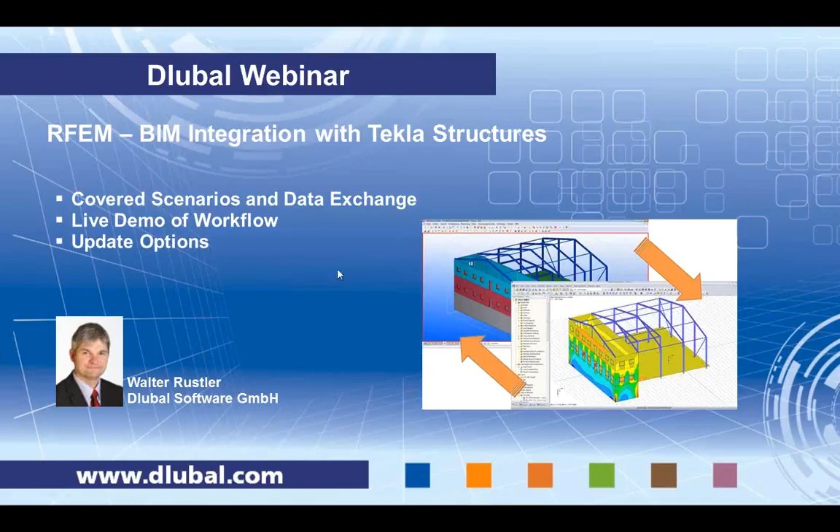It is a bidirectional interface with update options, and it works in a 32-bit and a 64-bit environment.

We can distinguish between a physical model and an analytical model, and it is important to know the difference. In general, when you work in an architectural program or a CAD application, you basically model the structure as you would build it later. When you do an analysis, you make a more simplified model that doesn't include all objects, like door frames, window frames, and other non-load carrying parts. Therefore, we have to make a difference between the physical and the analytical model.

In general, there are some problems when you work with a physical model in a structural analysis program, because, for example, a beam might be cut off at the edge of a column, and therefore there is a gap between the center line of the column and the end of the beam. So in the analytical model, we have to overcome this gap and provide a connection, basically bring together all load-carrying parts in one structural wireframe model. It's a mechanically correct model that includes maybe 1D members like columns, beams, or bracings. It may include walls, slabs, or other surfaces.

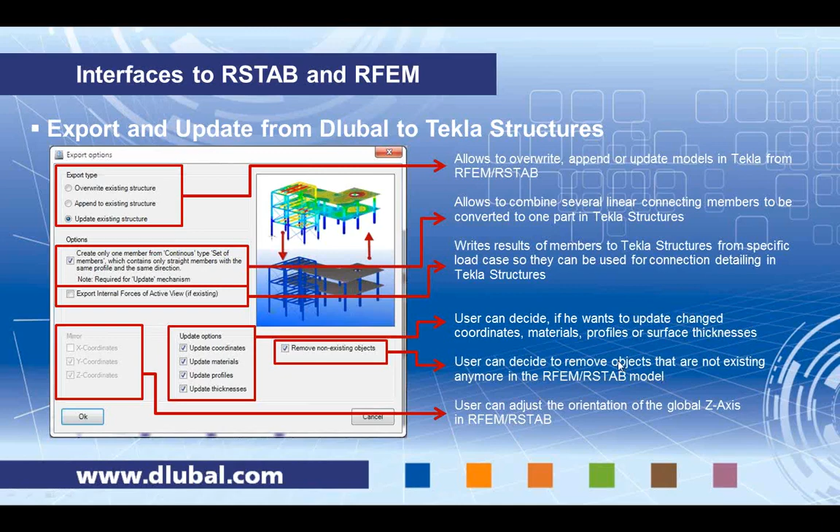Additionally, we transfer information like the node numbering of the Dlubal analytical nodes, the material, or member numbering. So you can find the parts that you see in RFEM also in Tekla Structures. By inquiring the objects, you will find, okay, member number 235 in Dlubal, this is what I have here now, and I can go to the Dlubal model and see where member number 235 is.

All those user attributes can also be displayed on a drawing, for example. So it would be a good way to use it for an overview plan that displays the numbering of the structural objects, or whatever you need it for.

Anyway, we can update the Tekla model with grid lines, with information about the used materials, and also the node numbering, and additionally comments. That means I can write, for example, this is a new beam, and then this comment will also be there as a user-defined attribute, which you can use for filtering inside Tekla and so on.

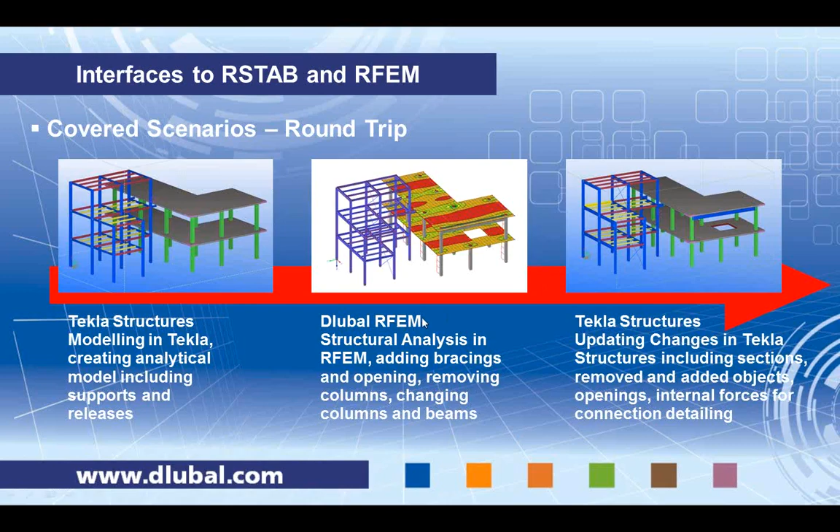Another option would be, and we will see this live in a few seconds, to start modeling inside RFEM. RFEM has great modeling capabilities as well, or you can retrieve a model from somewhere else, from other applications, and we do the structural analysis, but there is no Tekla model.

But somebody would like to have a Tekla model from what he has created inside RFEM. So we can just export it and create also a Tekla Structures model from scratch.

The advantage of this is that, for example, you are a draftsman or a detailer, and you need to know which cross-section is used for which column, for which beam. If it's a simple model you can understand and read it, but imagine there are 1,000 members and 500 different cross-sections - then it's not so easy to even know which cross-section is where.

And if I have a Tekla model and I'm a Tekla detailer, I might want to work inside Tekla, not so much inside the RFEM viewer. So I can use my own well-known tool to get this information and communicate it with somebody else, or even use it for detailing and modeling.

All in all, it is all about saving time, increasing quality and productivity, and this at the same time means avoiding errors. I think you have very well matching tools here with RFEM and Tekla Structures.

The next will be the live demonstration. We will do this 3D building here and import it from Tekla Structures. But before we do this major structure, I'd like to explain a little bit the options you have inside Tekla.

I would like to point out that I'm not a Tekla expert, but I can show it a little bit. And if you have questions about Tekla, please also contact your Tekla vendor or your Tekla company - you can find them at tekla.com. I'm sure they can help you out in more detail.

I have Tekla open in the background, and I'm now inside Tekla Structures. Here I have a simple model which is not very spectacular, but it includes a few things I think that are important to explain the use of this interface.

So here you see the physical representation of this model, and you see there are certain beams and columns. We have here the situation that some beams are top of steel, some are maybe connected center line, above, whatever. We also have here a column that is a typical situation where there's a wide column and a narrow column.

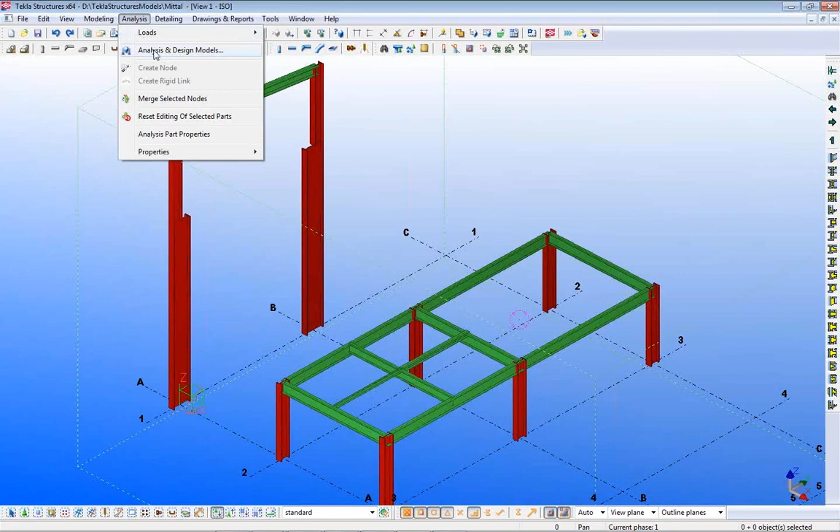And then how to model this in the structural design. The special thing about Tekla is that it has an analysis and design option here. I start this, and I have prepared already a few models, and I can show, for example, when I select this model what happens here. I get a display of the actual analytical beams.

We see here, for example, here now everything is modeled by the center lines of the columns. So the statical model is in the center line of the physical model, and because of this we have here an offset, and this offset is closed by a rigid link, which is shown there in blue. This is done automatically by Tekla, more or less.

Then we have here the beam on top of the frame, and here the analytical line is in the center line of the top flange. So it is important because you might want to have the correct column length or the maximum column length, and if I analyze it in the center of the beam here, then I would lose maybe half of the depth of the beam and so on.

And maybe if I have a wind load there, the wind load is not big enough. So how can I do this?

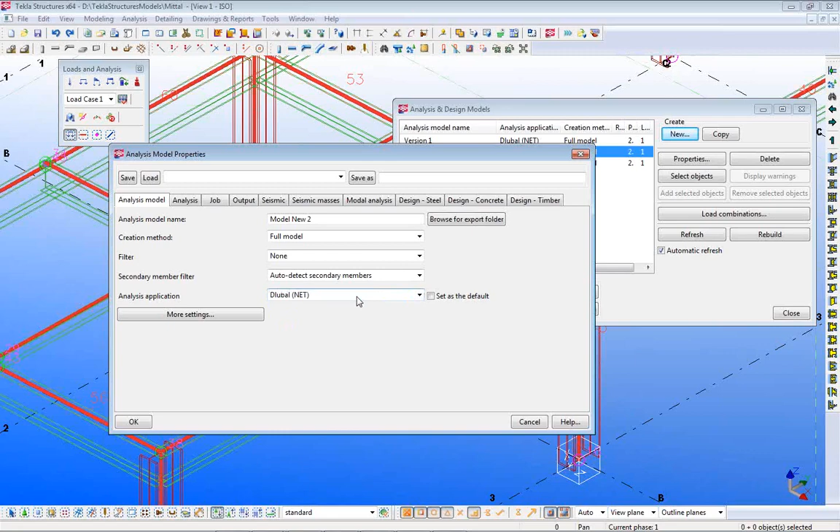We use basically what I'm showing you now. Here we have a Dlubal.net plugin, which is installed automatically when you install Dlubal after Tekla is installed. So during the installation process, Dlubal looks for Tekla Structures. If it finds it, it will automatically install this plugin, and then you can select this interface. There might be other interfaces here listed in Tekla to use.

And then we have here more settings, and in those settings we can set up the reference axis, member axis location, and this is an important thing. Now it's set up reference axis eccentricity by neutral axis. I can also use, for example, the neutral axis. If I do this and click OK, you see what happens.

All the analytical members are moved to the center of the physical member. Because we have here a different depth of the sections, we have the problem that the center lines do not meet in one point, and Tekla automatically creates here so-called rigid links.

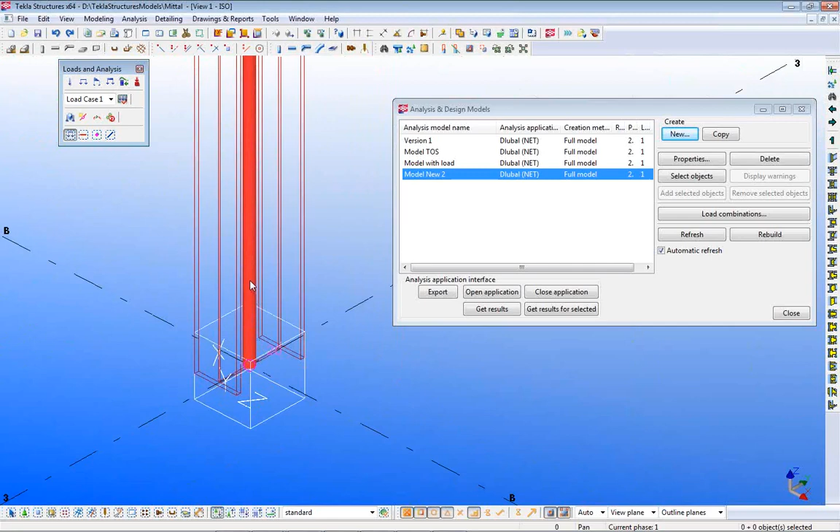Also inside Tekla we have here, for example, support conditions symbolized by a white block here. If I edit the member here, okay, let me see, to edit it, okay.

It's possible typically to... maybe I have a filter which is not, yeah, I'll show this later to you. We see here that there are numbers for beams and for nodes. We see here the supports. We see here how the physical model changes.

If I change it again, for example, to not neutral axis, but reference axis, if I do this, it is rebuilt automatically, and you see here other placement of the center lines.

Okay. Yeah, I didn't activate my mouse arrow here. So let's say I want to change something here, not globally but locally.

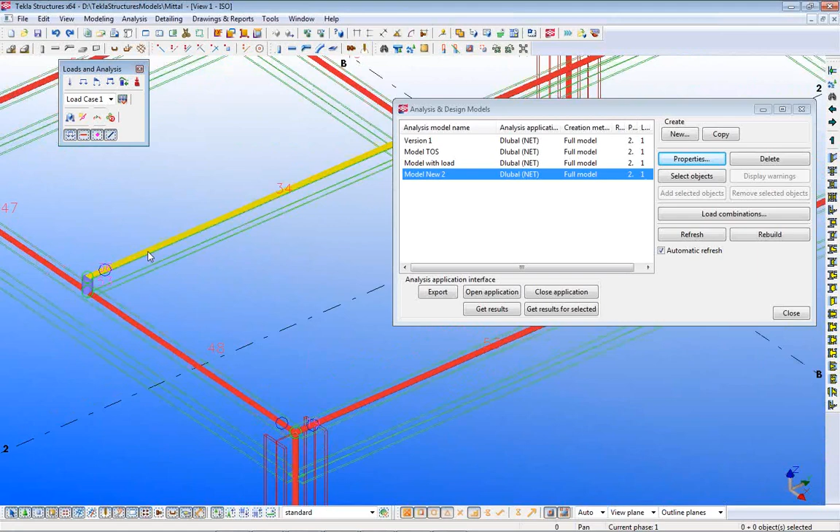For example, here I would like to say this analytical object here should not be on the reference line. I can change it, and I can say here, okay, position, not reference axis, but maybe neutral axis. And I modify it, and axis, reference axis, let's see what happens.

I had this problem also yesterday during a demo, and then it worked, but never mind.

You can do it also individually. That means you can do it globally, so all the offsets are changed, or you can do it member by member. Let's take a look at the support conditions.

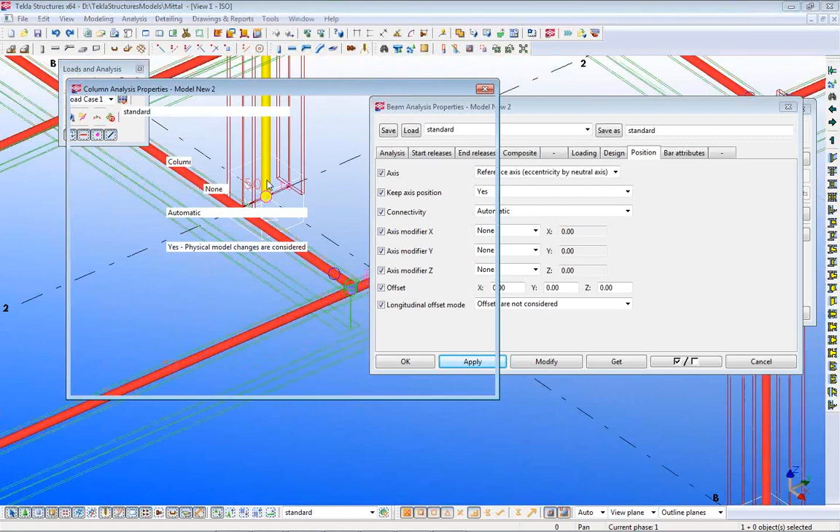If I click on the column, for example, you see here start release is a support, or it can be a pinned support, or it can be only connected, or you can have also free definitions. Then you can enter here some spring constants and so on. Or the end release is only connected. So on the top here we have no connections. Or the same thing here for the beam.

I click on it and I say start release is connected. We see here with a release, and I see here a circle. If I do not want to have the release and say I want to have it fixed, I modify it, and then it's changed.

So it is possible to individually adjust this analytical model. I open another model here.

We see, for example, there are also loads. I can display the loads basically here. You see here there's a load inside Tekla Structures where we can apply the magnitude of the load, and this is also possible to implement inside Tekla.

Maybe I try to import this model quickly into RFEM. I open RFEM here. In RFEM, I open the direct import from Tekla Structures, and I get my import option that we just saw in the slide.

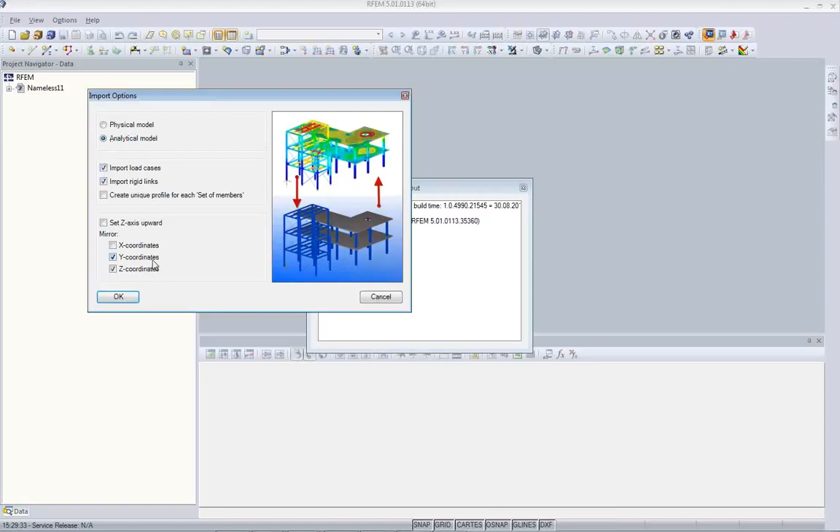I want to import the analytical model. I import load cases, the rigid links we see, click on OK, and now I have a selection of the various analytical models I have inside Tekla Structures. So the same models that I have here are given to me as a choice inside the interface.

So now I use the model with the load, which I'm just displaying here. I click OK, and there is a little bit of a protocol that goes through, and then I have here my structure inside RFEM.

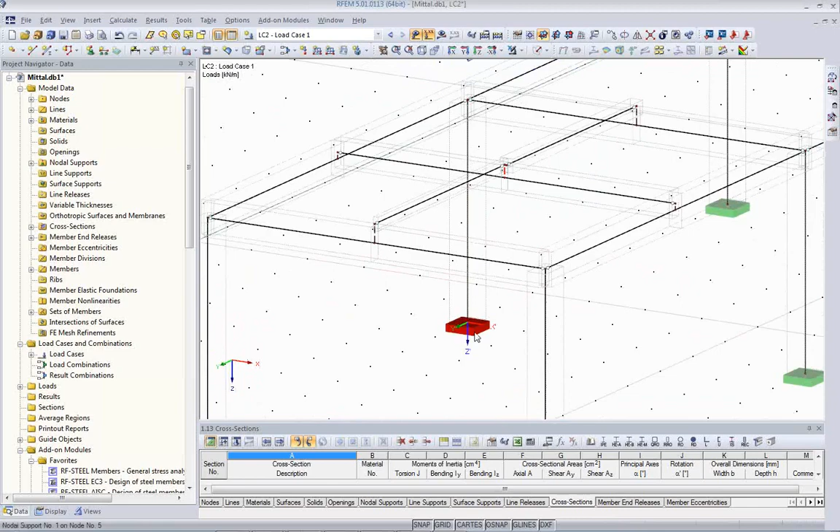We also see the load is here. And if I go to the wireframe display, we see here also we have rigid links, we have the offsets that come from the Tekla structure model. We see here also the support conditions are here that we can use and so on, and also the columns have this offset here.

So this is how you can set up your model inside Tekla Structures and change it and already prepare the structural model inside Tekla Structures.

Now I'll use the more complex model that I have prepared, and I open this inside Tekla Structures. This model includes not only beams but also slabs and walls, including openings, and I prepared several models inside already.

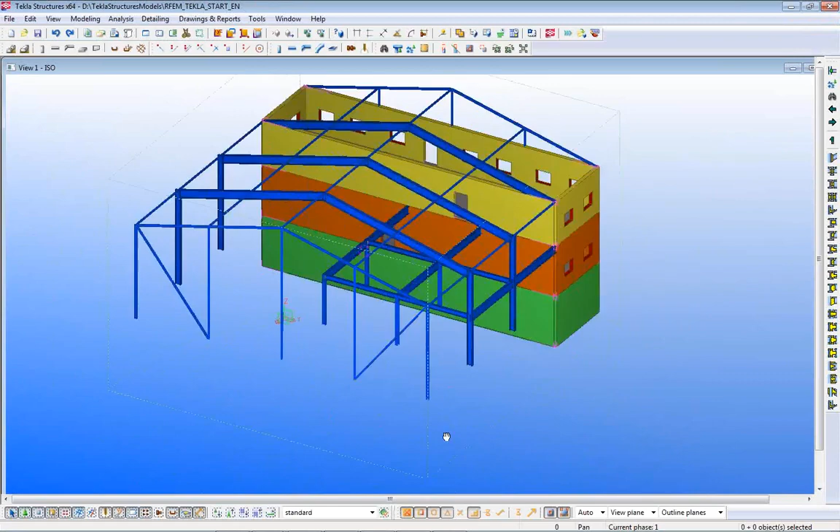You see here it's a hall including a second level here, and there is a basement including some slabs here with openings, windows, and so on. Inside this model I have prepared already the analytical design model.

Actually I've prepared several models. I have prepared, for example, the concrete part, so I only get the concrete part here. For example, I can quickly import it here. Concrete, and import here the analytical model. I don't want to load this time, and say here concrete part.

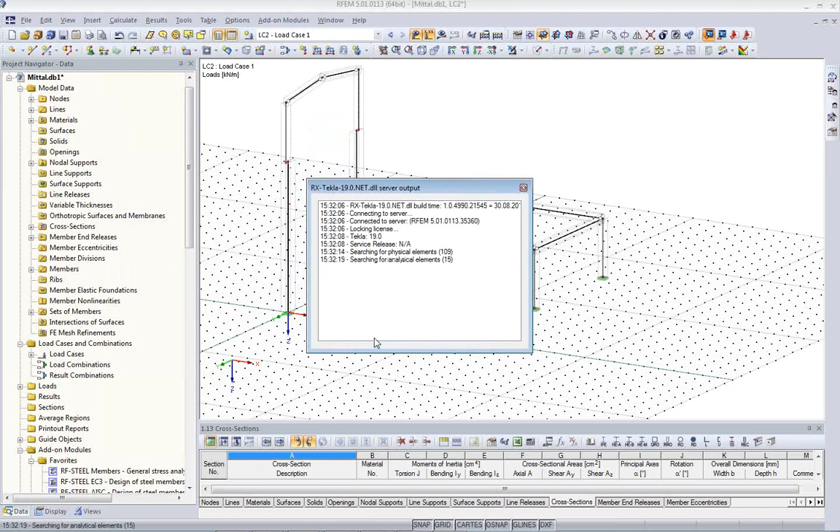So even though I have a 3D model in Tekla Structures, I can load only part of this model, and I can say, okay, now I don't want even the 3D concrete model. I want to have maybe only one floor or one slab in the first level. So I have just one slab here that I can work with, so I can do a simplified analysis.

And also the same way I can say I want to have only one end wall, and I do like a 2D analysis of this end wall here, for example. If you want to, you can import only one beam if you want to.

Please note, here's two analytical members. Inside Tekla we have one part. When I update it later, it will be staying one part inside Tekla.

Okay, but actually I want to have the entire model. Maybe I explain a little bit about the entire model that I have done in Tekla Structures.

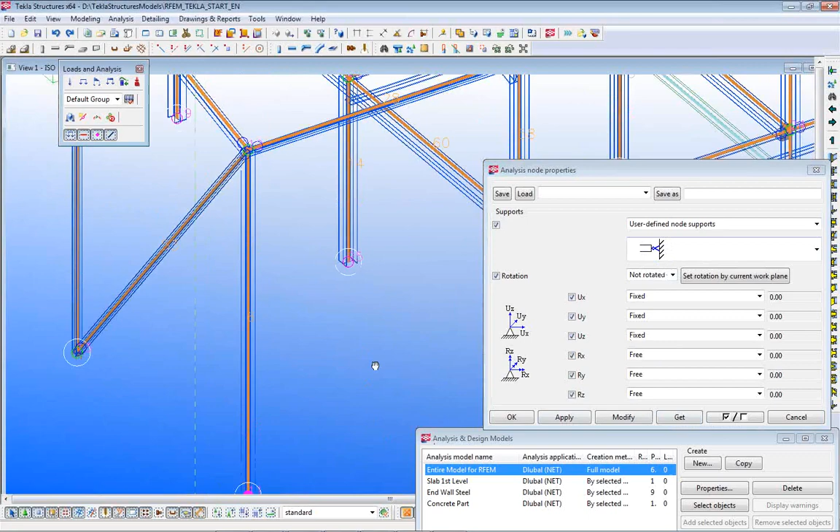Here we have support conditions, which are pin support. We have here set up releases already at the ending of some beams here.

We have openings. I've made the model in such a way, for example, that those beams here are modeled as top of steel, and this analytical model lies on top of the, in the center of the top flange.

So it's one level. And important is when we update the sections later, that those sections, even if they change in the section, they should stay top of steel.

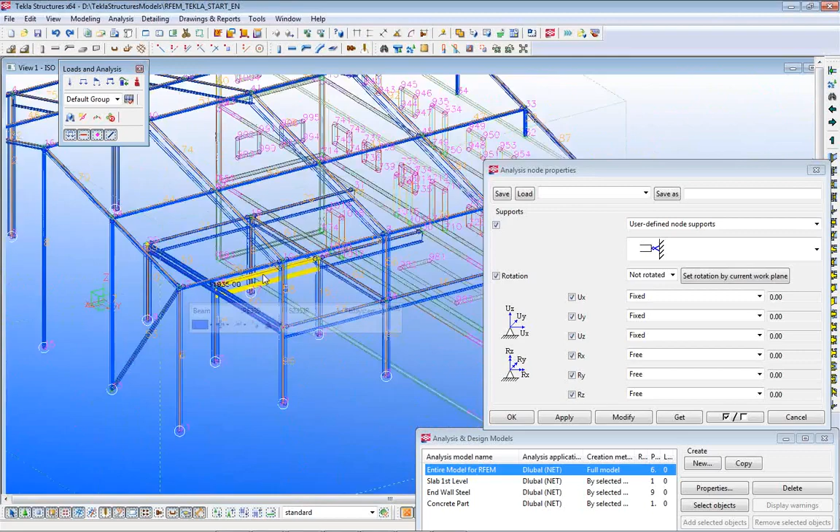Also here the walls are modeled as center lines, and the slabs as well. So I'm closing the model here and staying with the physical model view, and I start inside RFEM and import the analytical model, including rigid links, which I don't have at the moment, and I click OK.

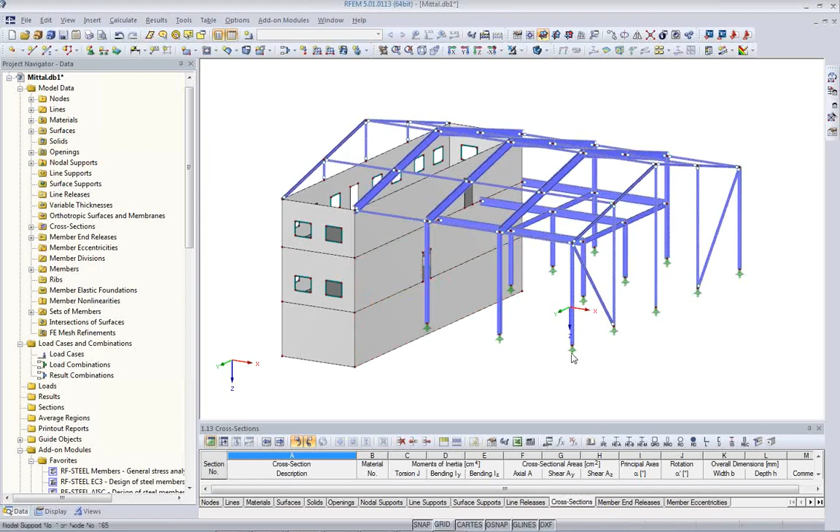We have the openings, and we see on the display that we have already cross sections imported. When I look at the table of cross sections, I see they are all converted from the Tekla designation, which is missing the blank between the IPE and 550, but Dlubal has a blank there. So we internally map all these cross sections.

Also, the materials are already set up according to Eurocode, and in Tekla the material name is much simpler. We include the code. How does this happen?

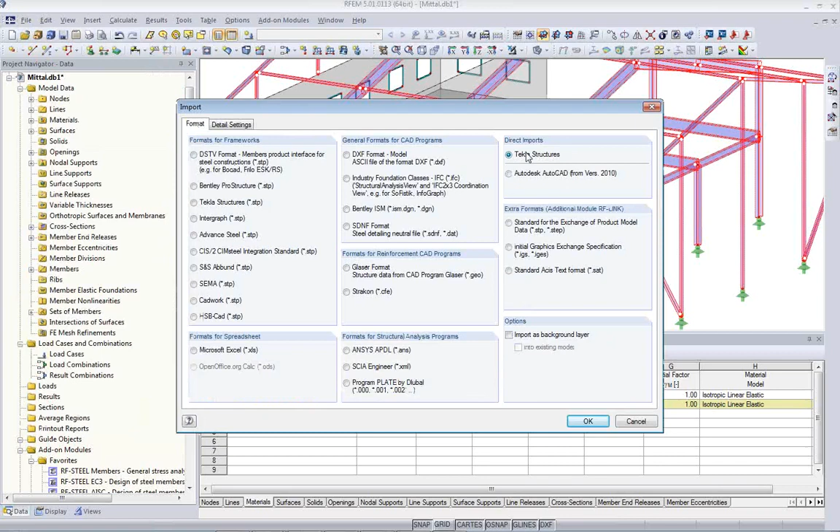When we import, we have a variety of files, of course. We use direct import from Tekla Structures, and in the detailed settings I have the option to set up a conversion file, or I can edit this conversion file. Here I set up which name of the material or cross-section should be converted to which name inside Dlubal software.

So I have the option to import or export it from Excel, and I can set it up in my company as I like it for my typical materials. Once I have adjusted it, it will be valid all the time.

The same is for example for cross sections. You can use this very well if you have non-standard sections, sections coming from different vendors. Everybody has his own designation, and for us it's basically impossible to know all the names existing in the world. So we match the Tekla name and the Dlubal name, and can now translate those cross sections automatically.

Okay, now we'll do a brief structural analysis with this model here, a 3D analysis. We'll change some cross sections, add some members, and do some concrete design. It's a totally independent model from Tekla - I can do whatever I want with it. It's not some special model that only works in conjunction with Tekla. First of all, I would like to know if it's really working, if it's really well connected and done correctly, so I do a first run and brief analysis.

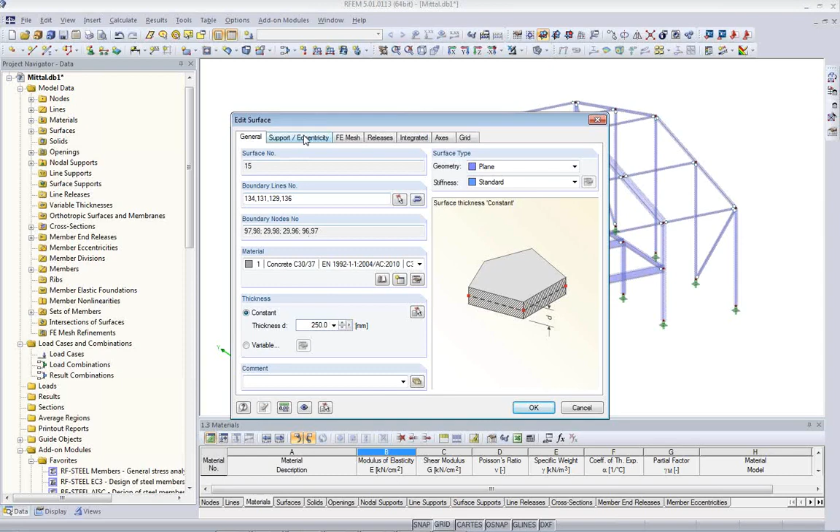First of all, I need a support on this foundation slab here, and I enter this support inside RFEM. I select a non-movable support as a first idea of this support condition, and edit the surface and add it there automatically.

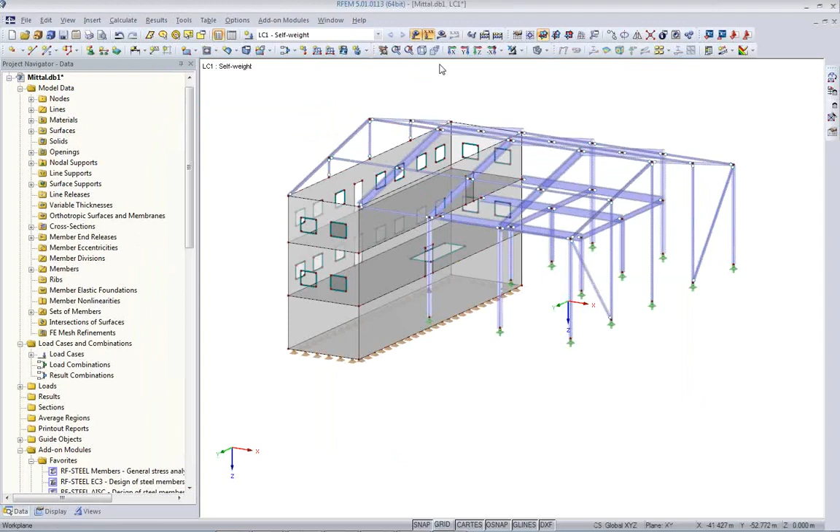Next, I need a load case to see how the deformations are, or if it calculates and if some parts are loose. So I do this simply by creating a new load case, called maybe self-weight of the structure. It will be done according to first order with a default mesh of 50 centimeters for the slabs, and we'll do an analysis. And it seems to be working.

I have here now a moment diagram which looks reasonable. I have here maybe internal forces of the slabs which look pretty okay. I can maybe show also the deflection - maybe not now for the concrete, which is rather massive, it's almost zero, but maybe I only show the steel parts.

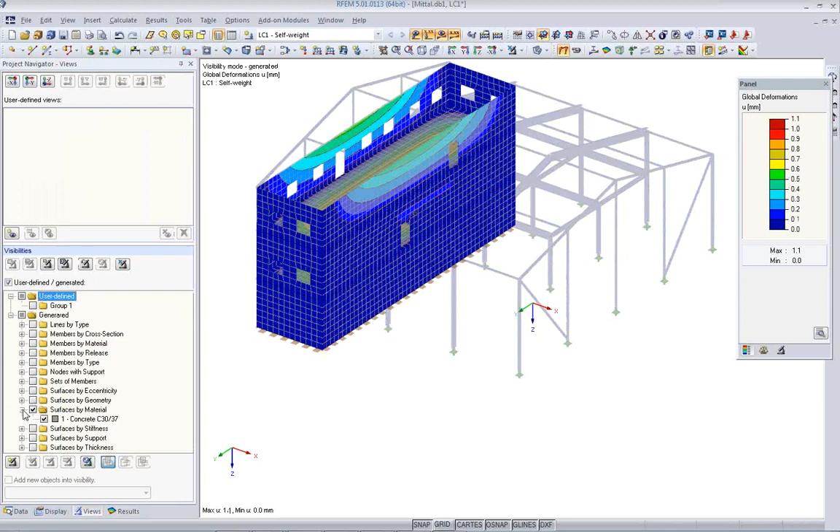Concrete surfaces by material, but members by material, so we can see here all the deformation lines of the members. I can animate them, and this way I can find if there are some loose parts usually, and it looks all good.

Also, the support condition should be more or less symmetric, which is here at the columns, at the corner columns, and there's a little bit of difference because here we have this floor structure in here, but it looks quite okay. So my model is of good quality, and I can continue doing the design process.

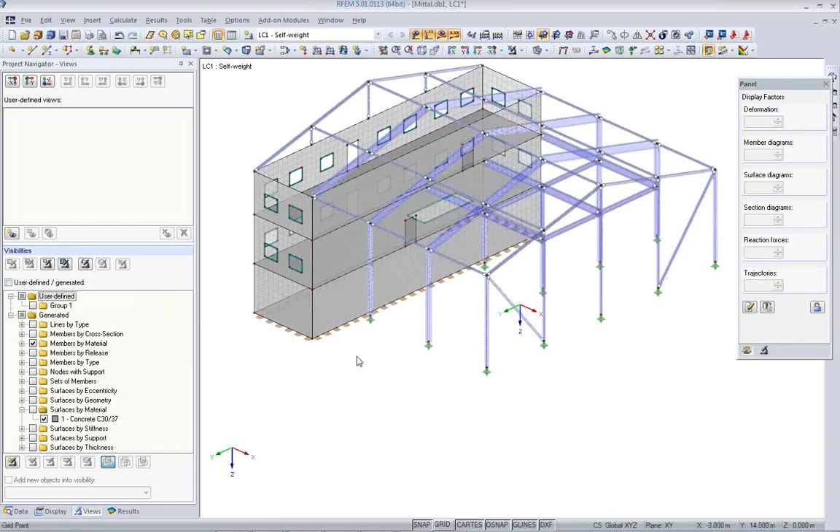First of all, I have to create - maybe I've checked another thing from the structural point of view. I need some bracings here in the roof. Typically we have some bracings here. The first level here of the grid is supported horizontally by the concrete part here, but the roof structure maybe is a little bit unstable, and I would like to have a bracing here.

Before I do this, maybe I prepare some typical views of the structure, and I select the roof, and I create a new visibility from this roof structure like this, and I say okay, this is what I'd like to save, and I create a new user-defined view. I call it roof.

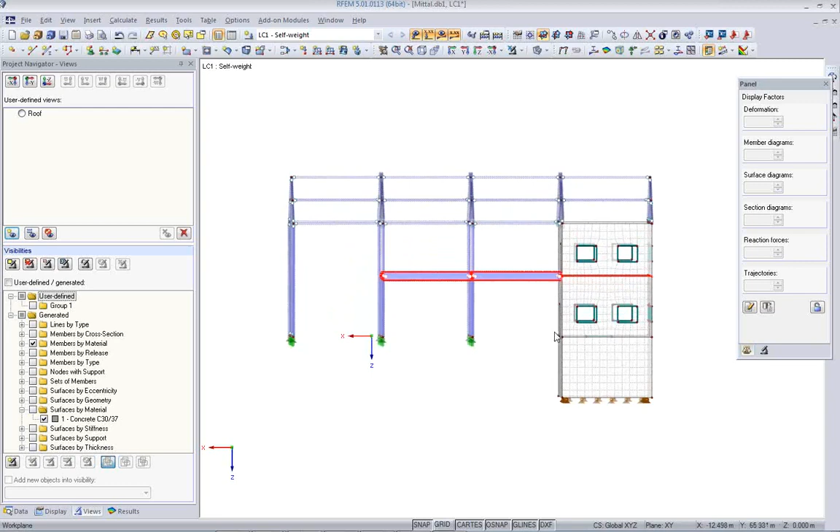Next, I like to do similar things, for example, with the floor here and the additional slab. I can select it like this and say, show me only the selected parts. This is another view I'd like to save, and I call it floors.

Additionally, when I go to the default RFEM view, it's displayed this way, but Tekla always uses this kind of view. If I go back to Tekla, this is their default view. So in order to avoid confusion, I'd like to save this view as well, and I write there Tekla. From now on, if I need a different selection of my model, I click here and I have everything I want.

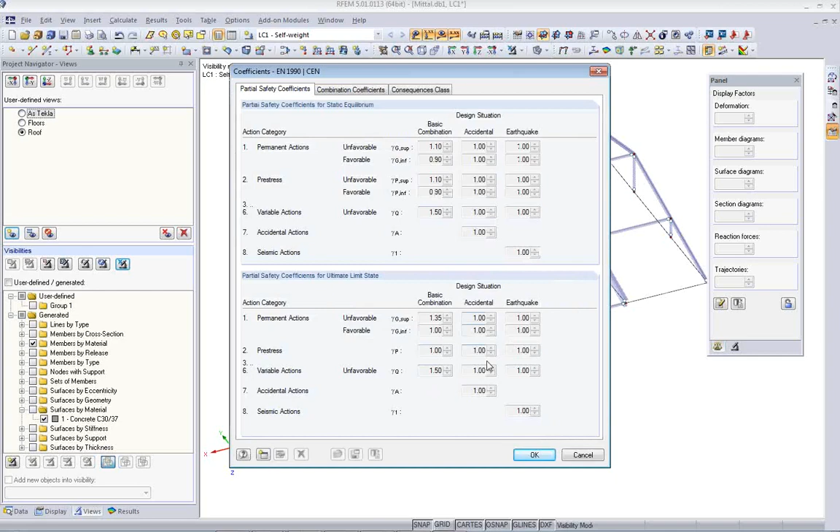Okay, let's start with the loading. When I go to the general data of the model, I can set up the load cases and combinations according to a certain code. I'll use Eurocode for this. I have here the various national annexes. Because we have an international audience today, I use the general Eurocode settings, available at the detail settings, where we have access to partial safety factors, combination factors, and consequence classes.

Once I do this, I can also create combinations automatically. We stay with a 3D model. The advantage from now on is that all the loads and load cases I enter are classified according to this code for snow, wind, and so on, and the software knows automatically which combinations to create and which combination factors to use.

I can do it most comfortably in the tables, which I can display or hide. Next to the model data, there is the load cases and combination data.

As you've seen, there is an automatic combination done, but as soon as I change the load case setting—and it doesn't regularly make sense to have combinations with just one load case—it will update or delete these combinations that had been created automatically before.

I create, next to the self-weight, a second load case called snow, and I have access to all the action categories for Eurocode. I have wind as a next load case, and another load case that's not listed, so I type it in here: live load. Then, because it could be anything written there, I have to make sure I choose the right category—this should be an imposed category B for office areas.

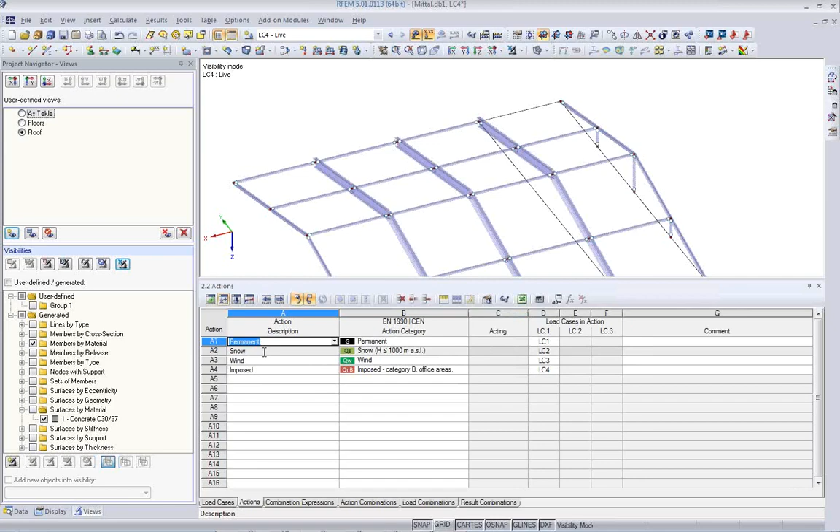Okay, I have 4 load cases, which should be enough for this demo. I have actions, which is a first summary of all the wind load cases and all the snow load cases—they are summed up in actions, and then we combine the actions. Typically we have an ultimate limit state combination and a characteristic, frequent, or quasi-permanent combination.

I want to do a preliminary design, so I'm only interested in the ultimate limit state combination. Then I do a combination based on the actions, and I do the final combinations, basically, which include the load cases and the safety factors.

So now I see load case 1 at 1.35. Most likely this will not be controlling. Or I have load case 1 at 1.35, load case 3 at 1.5—load case 3, I think, was wind. I leave it out because I already have load case 3 somewhere with 1.5 in another combination. So you don't have to calculate everything, but you have a selection here of what you really want to calculate—so you don't turn off your brain. You control the software, the software doesn't control you, and you also see exactly what the software does.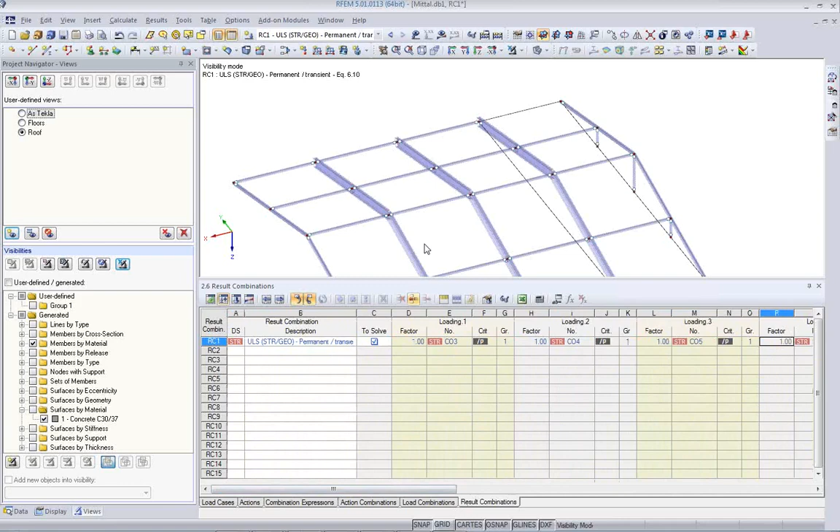Okay, then from these 13 or whatever combinations, I can create a result combination, which is the envelope of all the calculated combinations before. So I get a max-min summary of all the combinations I have to analyze. Okay, this is the combination part.

Now we talk about the actual loads. Self-weight is already here as a self-weight of the structure, but I need to add now the actual loads. So I go to the wireframe view, and I add now a roof load quickly.

It's a surface load applied to load case 1, and the magnitude in this case is 0.5 kilonewton per square meter, and it should be in the global direction but related to the true area. So I pick my boundary nodes of the surface, and I can continue doing this for multiple surfaces.

I click OK, I return to the dialog, and I can select parallel members that should not be loaded—so only the red members will now be loaded. I click OK and OK again, and I get some summary and statistics, and I see here my first area load.

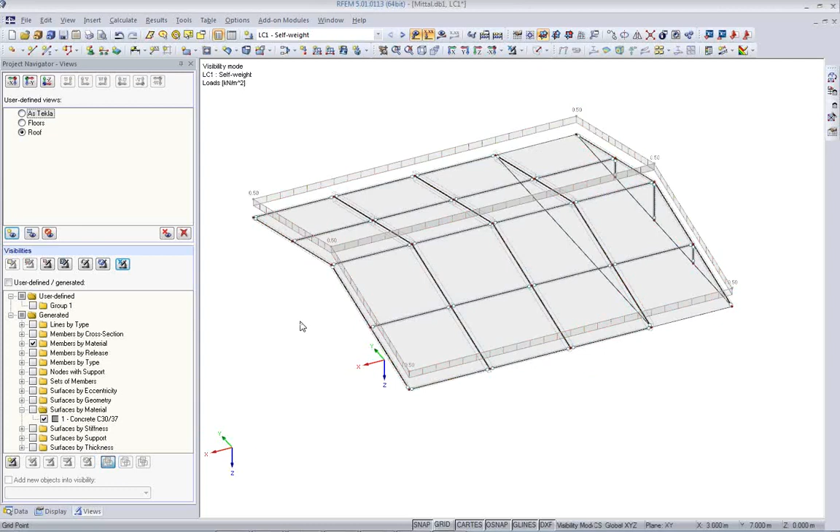The next load, our self-weight load, will also have to be on the floors. That's why I prepared this view. I create another area load, a little bit more on the grid here, and select the individual corner nodes, and decide that the distribution of the loading should be on the cross beams. Then 2 more surface loads on the slabs, 0.5 here and here.

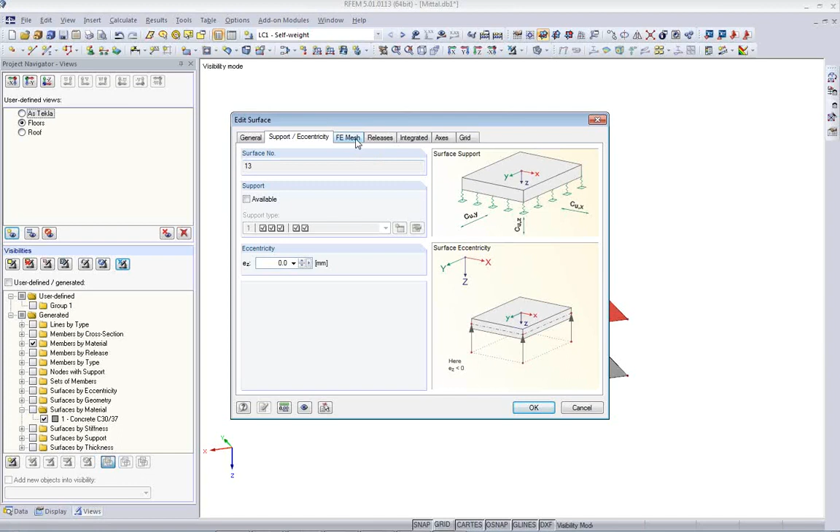While working with the slabs, I remember I forgot something. Those slabs now are rigidly joined with the walls, but I don't want this. Therefore, I double-click the surface, go to releases, and add a linear release that sets off all the spring constants for moments on all the edge lines of the surface. Then I get displayed a linear release on the edge of the surface.

I do the same thing with this second surface, create a new release of the same type, so there should be no moments at the edge in the wall. Here, because it does this automatically on the opening, I have no wall, so it doesn't make sense to have the release there. I can just select it and delete it.

Now I think I have everything regarding the model. We've looked at the self-weight load cases, and we continue with snow.

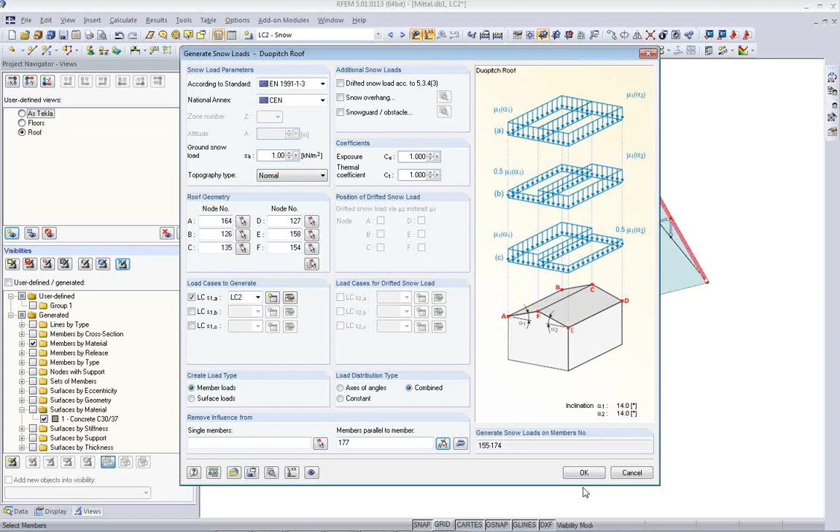Snow is something for the roof. Let me quickly get the roof here. I have a tool called snow load on duopitch roof, and I can use Eurocode here with national annexes. The ground snow load should be 1 kilonewton per square meter. I pick the boundary of this duopitch roof, 6 nodes to pick. It should go into load case 2, which is snow - it automatically filters and remembers it. I say only on the main beams I want this loading. I get a summary and my final snow load.

Next is the wind load. Wind is on the entire structure, so I go to wind here. I would like to have some wind in the -y direction, so I add a wind load as a force in global y direction, -0.5, on this surface and on this surface. On the opposite side, I have a little bit less, so I create a smaller surface load.

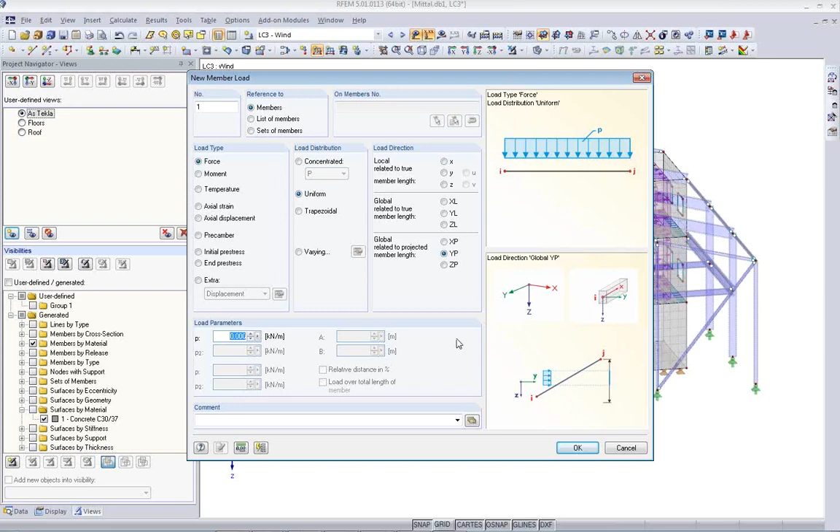I also need some loads for the columns - member loads, global y direction. It should actually, in the projection if it's not straight or vertical, be -2.4 as a member length load. On the edge, there should be a lower value, maybe only half. Then on the opposite side, again the same thing, but -1.5, a little less, for the center columns, and -0.75 for the edge columns.

Additionally, I have a wind load on the roof, and I use the generate wind load on duopitch roof function. Again according to Eurocode, I need the height of the structure, which I can grab from the structure, and I need to select the roof points.

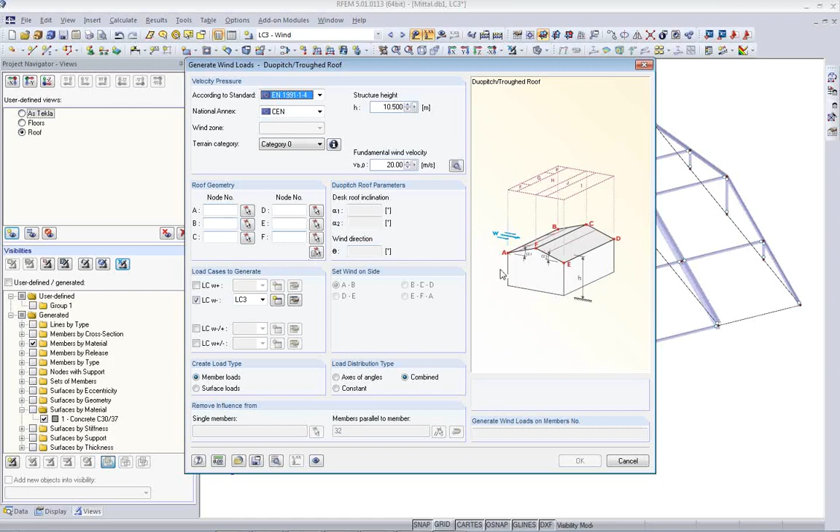I have the height, everything is fine. Now it's important to understand where the wind blows on the structure - you see here A, B, C, D - and I use this order to select my nodes as well. The wind load should be assigned to load case number 3, and I only want it on the main beams as well. You can see in the background the impact categories or areas, G, F, H, J, I, as in the code. It creates my uplifting wind load.

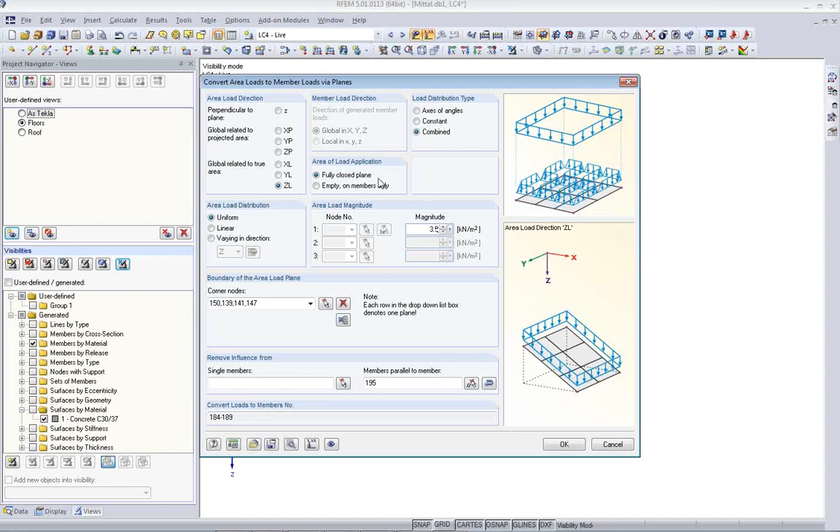Last but not least, we have a live load on the floors, which is basically simple. We can create another surface area load - it remembers the last input, so I only need to add the actual live load. It's updated here in load case 4, and the same live load, 3.5 as global, in the z direction on the slabs.

It is more or less complete now. Of course, I understand that wind loading can be much more complex - we need some load maybe working off the end walls here and so on. I think that is extra work that needs to be done.

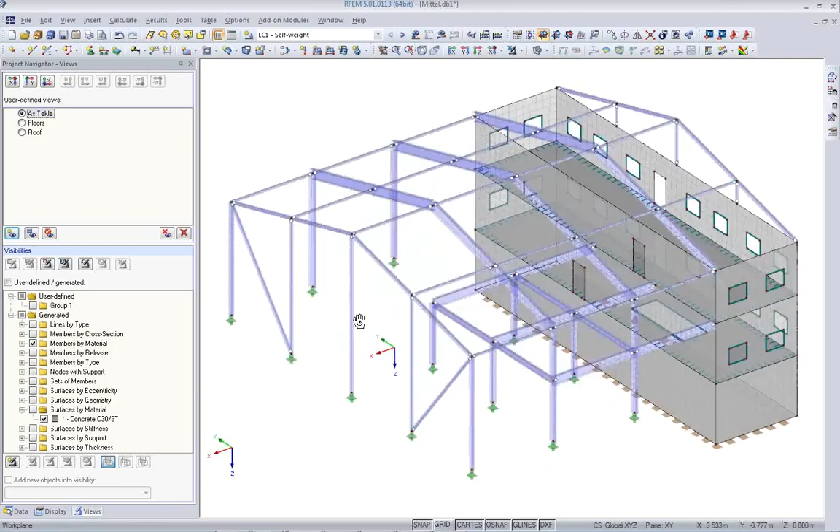We have, for typical structures, wind load generators as we've seen for the roof. But for our demonstration here, it should be enough, and we will now run the analysis of this structure.

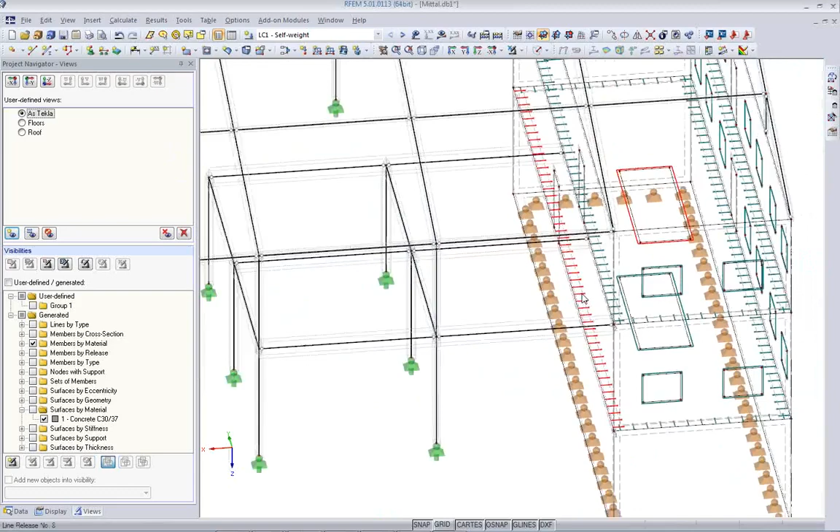Maybe before I run the analysis, I remember one more thing I'd like to do. I got a call from the architect, and he says he wants the same opening I have in the first floor also in the second floor, because otherwise there's no way to get up there. So we need to quickly copy this opening. I select the opening, move-copy it, make one copy, and copy it from here to here. Okay, so now there's an opening also on the second level.

Now we run the analysis, or we go to the design basically. Design is done by the additional module Steel EC3. I'll briefly go through this module. There are other webinars that already cover this module, as well as another seminar covering the concrete module, which I will show in a few seconds. But I will not explain all the details now, because we also want to exchange data with Tekla.

Now we go to the RF Steel EC3 module to optimize some of those sections. We have Eurocode design, we have national annexes here too, and I select a series of members I'd like to design. Here I'll use the filter tool again to select, for example, members by material, so I hide all the concrete stuff which has nothing to do with EC3.

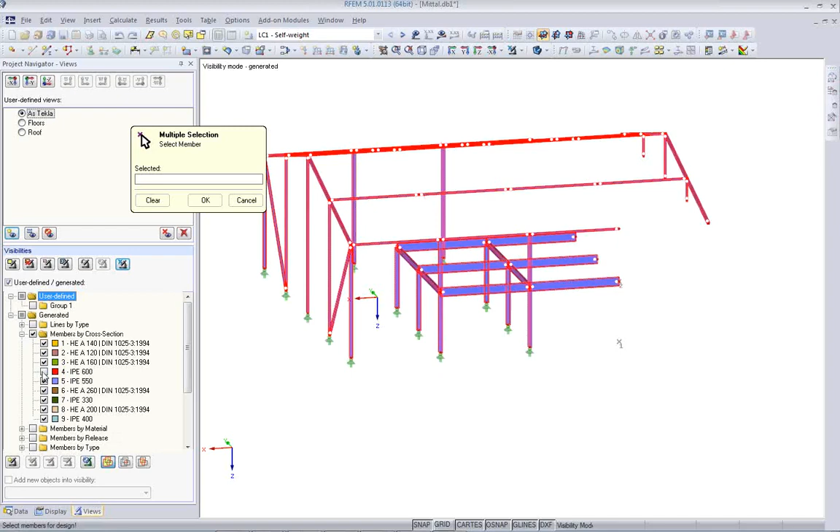Also, I can do similar things like selecting members by cross-section. And if I open this filter, I can say please do not show certain members — I don't want to see those. It has a reason: those main girders I will design in a different procedure, but the rest will be done as members, because all those members have design lengths equal to member lengths, with the exception maybe of the columns, but we'll neglect this in this case.

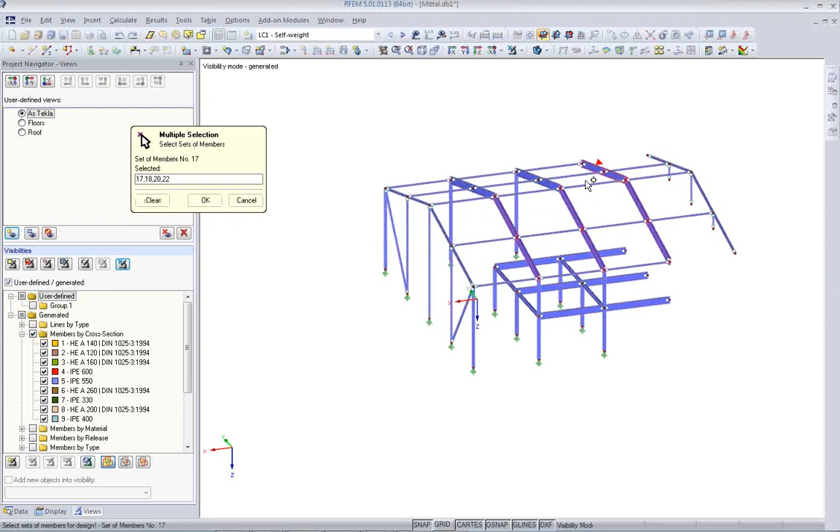I select for design the ultimate limit state combination I pointed out before, and now I'll also select the set of members. I select those main beams here, which are six main girders. The design length of these main girders is the entire length from the wall to the pitch of the roof.

It has a local support held by the frame, which I forgot to enter, supported by the bracing, which I also forgot to enter, in the center. So the buckling length in the weak direction of the cross section is smaller. I can select now in the stability design that I want to use the equivalent member method, or I can use the general method — but the equivalent member method is maybe simpler in this case, and is the more general option that's typically used, which is why I selected it here.

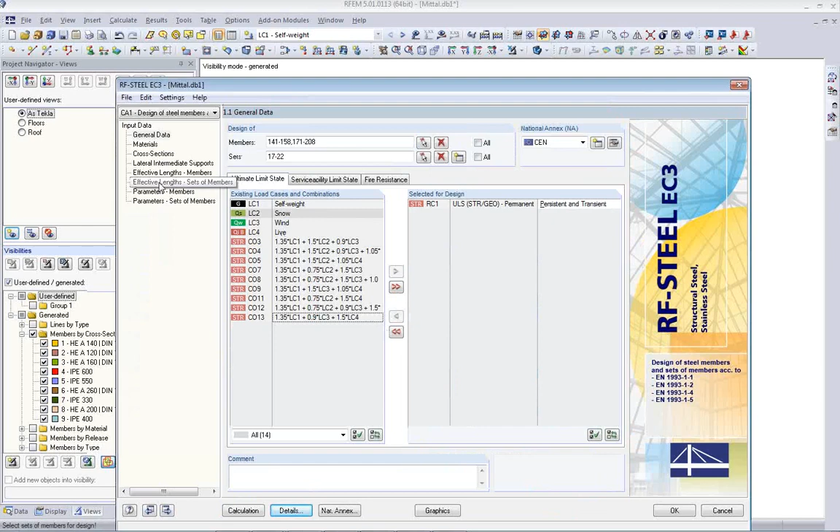We have the materials, we have the cross sections imported now from the structure. We have lateral intermediate supports for members, and effective member lengths — for sets of members too. And here I select the factor 0.5, so about the local axis z, which you can see here, the buckling length will be only half of the actual member length.

With the use of set of members, I can handle this very comfortably. Otherwise, I have the option to take into account rotational restraints from a steel deck, for example, or shear action from a steel panel, which of course increases the stability of those beams.

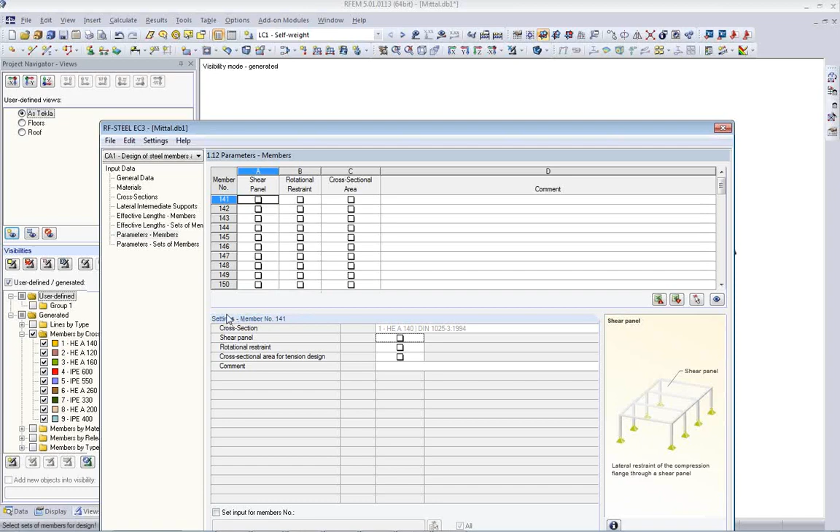Before I run the analysis, I go back and will enter the bracing, which I forgot. Let's go back to the roof. I have a tool that quickly allows me to add bracings.

Tension-only members. I create a new cross section, which I can just enter here, and select steel as the material. Now you can either go to the library to pick it, or enter it manually — if you know the name, it will automatically read it from the library. It's tension-only members, and now I can just select the bracing crosses here, which the software finds automatically as enclosed cells and gives me a symbol, and I can select those symbols. Otherwise I would have to manually enter all those beams, which is more complicated. Quickly I've created my bracing here.

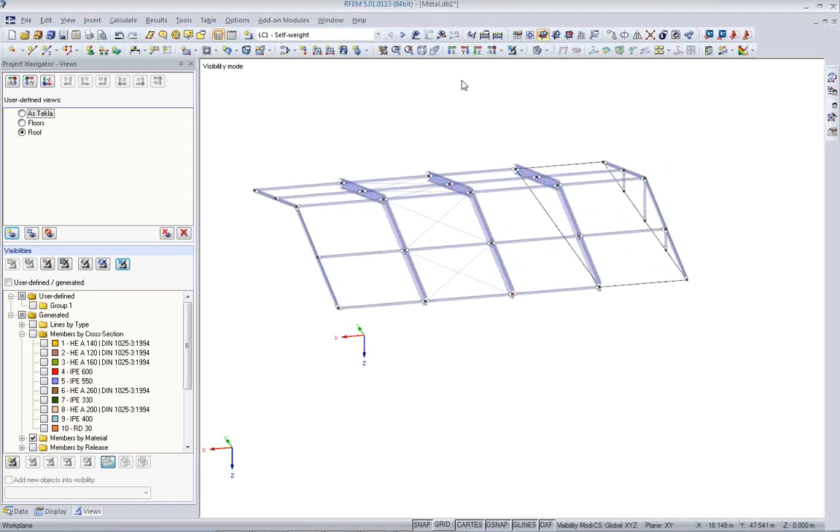Here we go, we have the entire model, and now maybe we have to talk about concrete as well. Let's design that too, right away — concrete surfaces.

We go to the surface module, and we also want to design result combination 1 according to Eurocode with the national annexes for the general settings. I have the materials as well here, the surfaces, and the reinforcement settings. I don't want to investigate all surfaces.

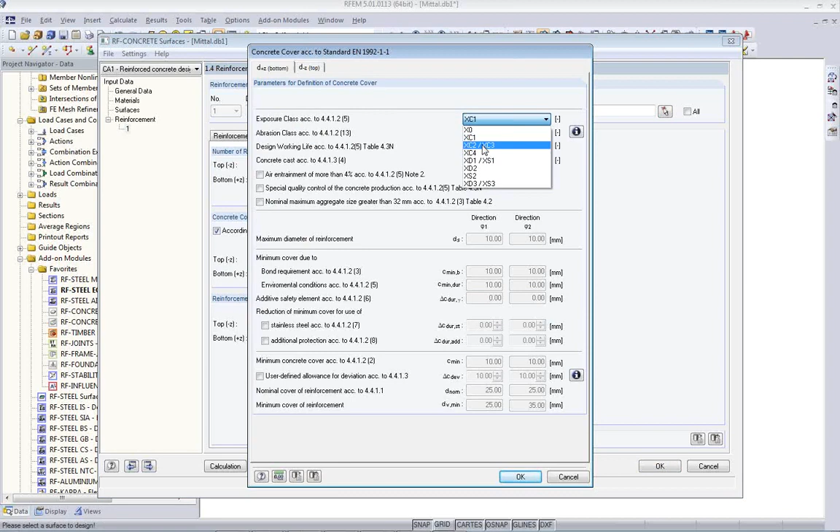I only want to have my 2 slabs. Here I need to talk about the concrete cover. I want to do it according to standard, so I just select the exposure class. Let's stay with XC1, and I get automatically the required concrete cover.

I can provide reinforcement that I decide to enter anyway, on top and bottom, to avoid cracks. There's also an option to analyze the crack width and so on, but for my preliminary design, I want to have this wire fabric here, and I like to check the minimum longitudinal reinforcement and so on.

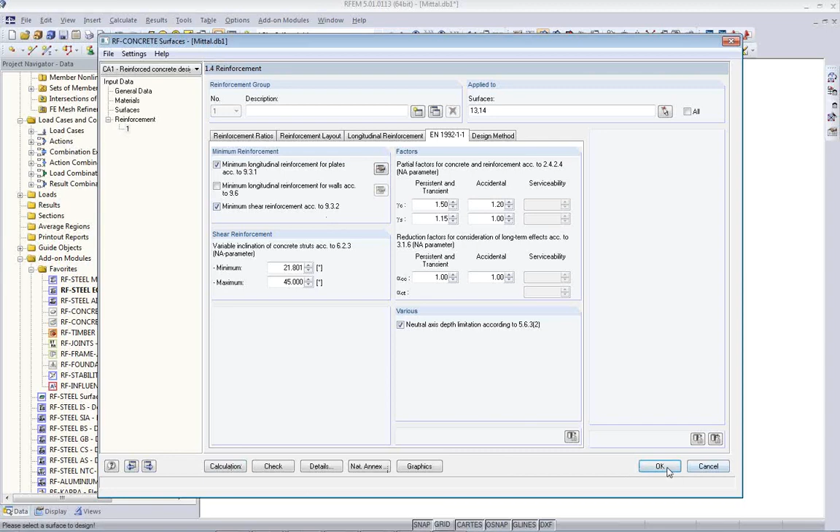So this is it for my settings, and I think now I can just calculate everything. Calculate all.

Now RFEM will calculate all the existing load cases that I have selected for calculation, and I hope everything is going well. I haven't checked it with the real loads, only with the self-weight loads, and it will take a little bit. It's a nonlinear analysis.

I can set up that combinations are done linear or nonlinear. Typically it's linear for load cases and nonlinear second order or P-delta for combinations, and we use now a nonlinear analysis, which is taking into account the additional moments from deformations. So equilibrium on deformed structure is maybe the important sentence to say here.

After a little bit we will get hopefully the results. Combination 12, and I think we have 13 all in all. So there are several iterations because we have failing members like the bracings, and also we have the second order iterations anyway.

Now we go to the concrete and the steel design, and we get finally some results. Let's take a look at the results maybe for the internal forces.

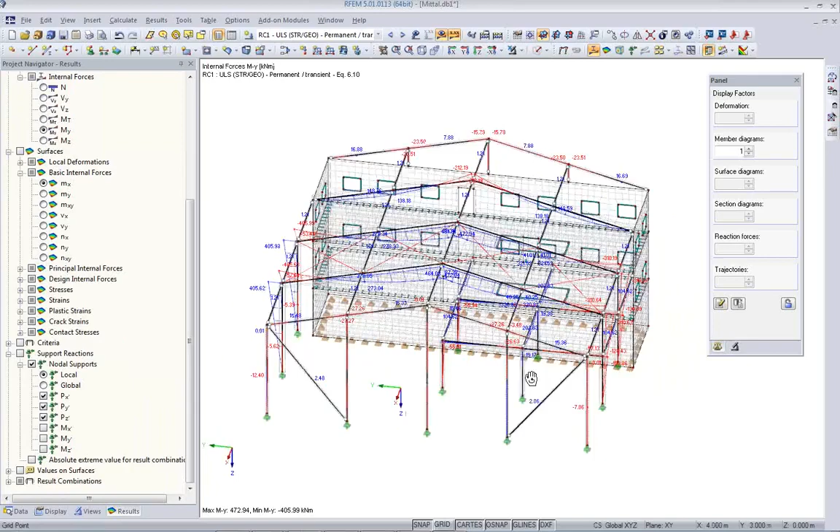Result combination 1, I go to the wire fabric display and wire display, and we see here bending moments, for example, from ultimate limit state combination. We can set up here axial forces, bending moments, strong axis, weak axis.

Looking at the weak axis bending moment, I see here, I don't like to have that. Maybe there's something wrong with my orientation. Yes, I have a frame here, it's a bending, it's a moment connection here, and it goes into the weak axis of this column, which is not good for design. So probably I have to change this. I'll remember this and do it later.

Let's see what we get on stresses. Steel EC3, ultimate limit state, design ratio is 2.55. Let's see which cross sections are a problem. I go to the cross section table and see here, okay.

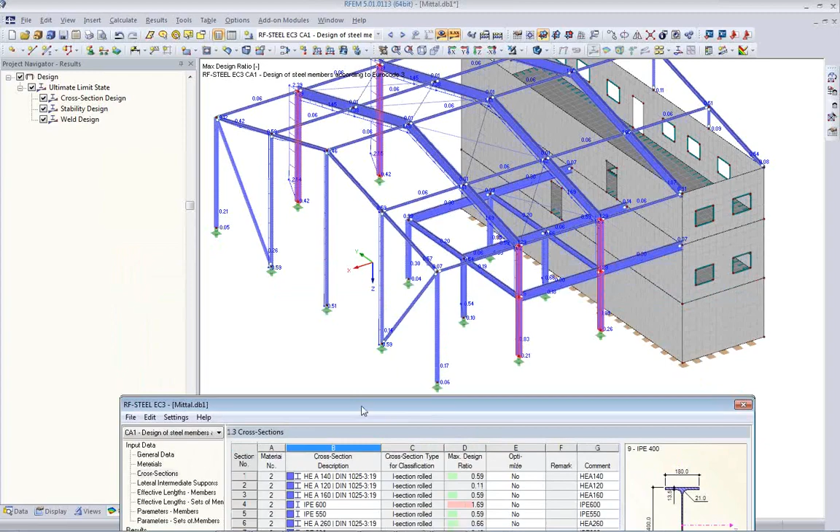There's a problem, not a problem here, not a problem here. These seem to be okay, but these main girders are a problem. Then we have the cross beams here, which are pretty okay. And I'm missing, actually, now here they are. These are the main columns here, which are not so good. We have IPE 400 here, and it's no good. So something needs to be done.

Probably it would be a good idea to have here an additional column, and also maybe to support these main girders here. Some design considerations that maybe are done while the structural engineer is doing his job.

Also, maybe I'd like to optimize those cross sections, and I optimize them from current row. This means I optimize, but I don't change the type of section. I use HEA, for example, and I stick with an IPE here. And this one I want to change anyway, so I leave it.

Those main girders maybe can be smaller, so please pick another one. Then we have here the columns, which I need to change, but anyway, I'd like to set them up for optimization. I also want to optimize those, and my main columns I want to optimize as well.

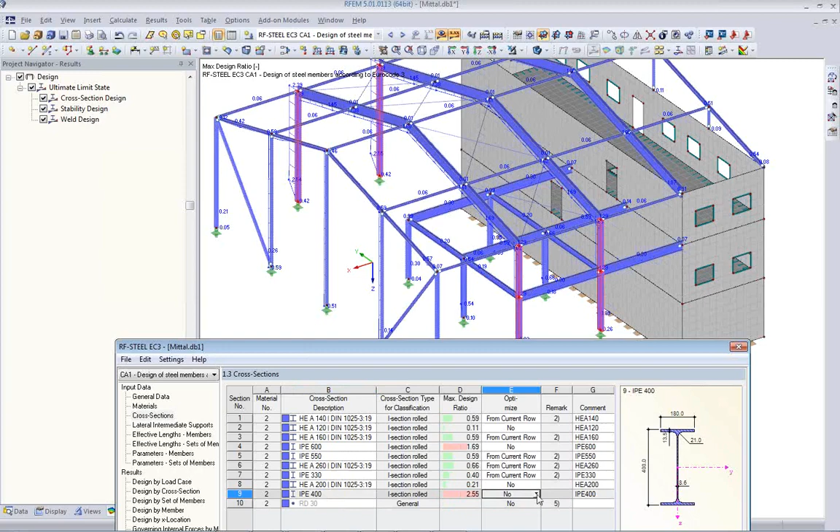I run the analysis now only in the steel check. So I rerun the analysis here, calculation, and see what I end up with for my internal forces that I have now.

So it picks an HEA 120 for the corner, 140 here, which sounds reasonable. 500 is okay, we have 240. Okay, let's stick with it. 240 instead of 330 here, and this is 600, so there's nothing to be done.

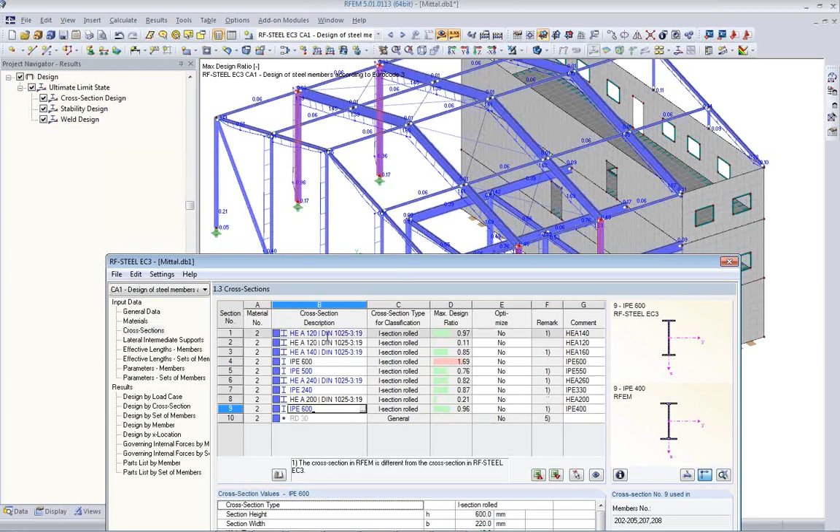But now the blue cross sections are optimized, and I can export them to RFEM to update my internal forces. I do this now because I have a better idea already from these cross sections. Okay, they are updated now from the initial design, and now I'm doing my model changes additionally.

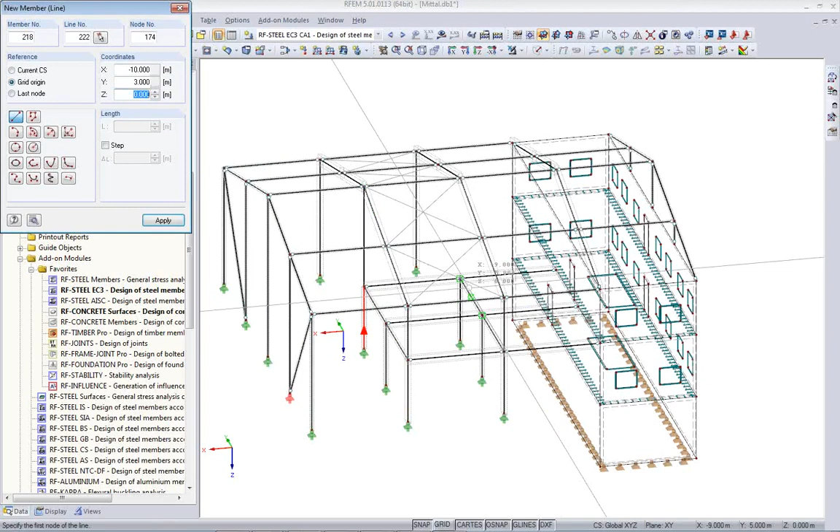That means I want to have a column here. I pick the type of column from an existing beam, so I have the orientation and the cross section correctly. Say okay, from here to here, and the same thing from here to here. Also I'd like to have this little column here at the same type. I copy it, make one copy from here to here.

Okay, so everything seems reasonable. Now here on top, I want to have an additional member release, so I have an easy connection up here. At the other end, I cannot forget to rotate my columns by 90 degrees, so they are carrying the moment in the right direction.

Voila. With this, I go back and run my analysis for Steel EC3. I just click, please show me results of Steel EC3, and RFEM will automatically update the results. This takes another few seconds, which allows me to explain something more in the Tekla model.

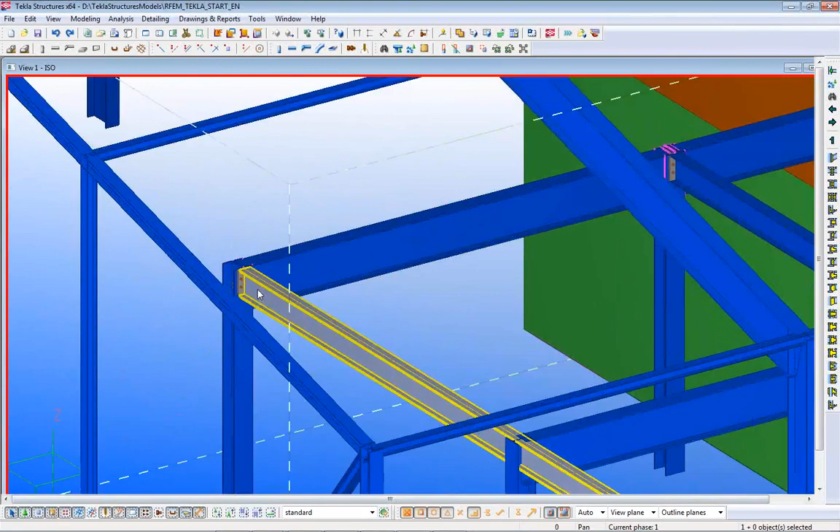In the Tekla model, I also have connections already done. So the connections may be done now while the structural engineer works on the design. And the connections are here. It's a very powerful feature of Tekla Structures.

You see here connections are there. We see here also that these parts are one part, one beam. This is one beam, these columns are one part. So it is a different model - the analytical model is a different model than the structural model.

Let's see what RFEM does. So we have a nonlinear analysis here. Okay, I'm thinking I'm running into a slight problem here, which I need to close and see what happens here. Okay.

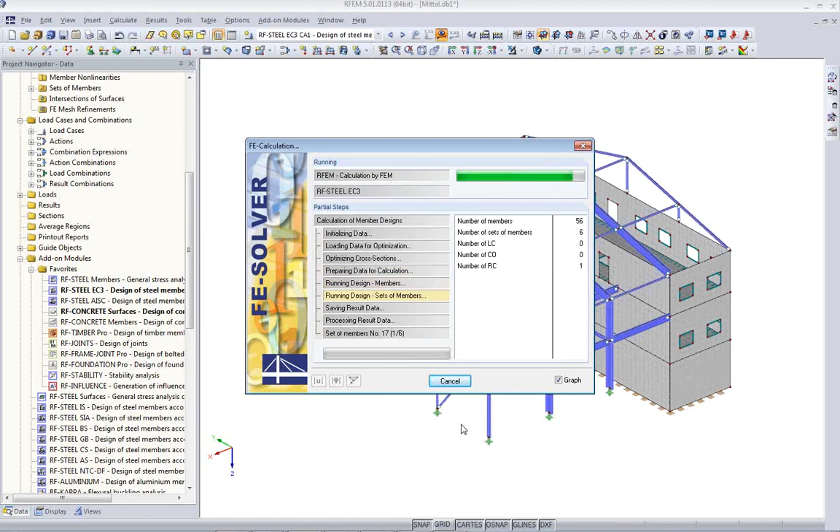We have combination 11 now that is analyzed, and then we should get some result. Okay. Now we get into the analysis of Steel EC3, and we have a design ratio of 95%.

We open the Steel EC3 module, and we see here the utilization ratios are quite okay. We are back to very low utilization of the main beam. HEB 600, which is the column here, is low. Then we have 600 here. So we could optimize much more, but we have some changes in the cross sections.

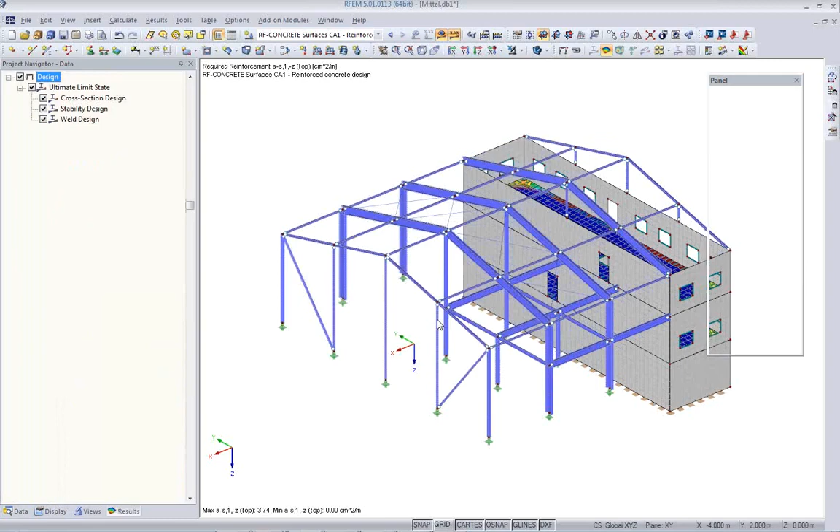Let's have a brief look at the concrete results and do the concrete analysis. And we get here - I can use my view again - floors. Okay, but I need the results here, concrete.

We see here top reinforcement in one direction, and in the other direction. We see here bottom reinforcement in two directions. This is the required reinforcement, and we can show the additional required reinforcement. So I have a basic reinforcement, and everything above this is now shown in different colors. So basically you put your wire fabric in here, and you put in the additional reinforcement where we have the colored parts. Okay, my design is so far done.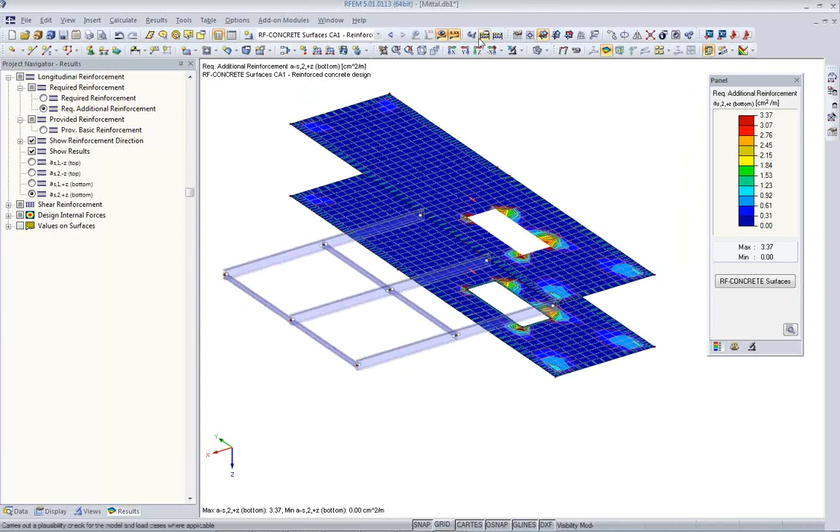I'll keep my results here, result combination 1, and we can now update the Tekla model. So I go to Tekla Structures. The model is here - I've pointed out the connections.

We go to RFEM and we say update existing model. So we update the existing model. We also export the internal forces, and we click OK. And then we go to Tekla Structures and see what happens.

After a certain time, we get the updated model. We see here now we have the bracings. We see here now we have the changed cross sections. We have here also the updated internal forces.

Now I can do undo, and you see the changes. We have the columns here, redo, and see how the connections follow the changed situation. So also we should have the opening here.

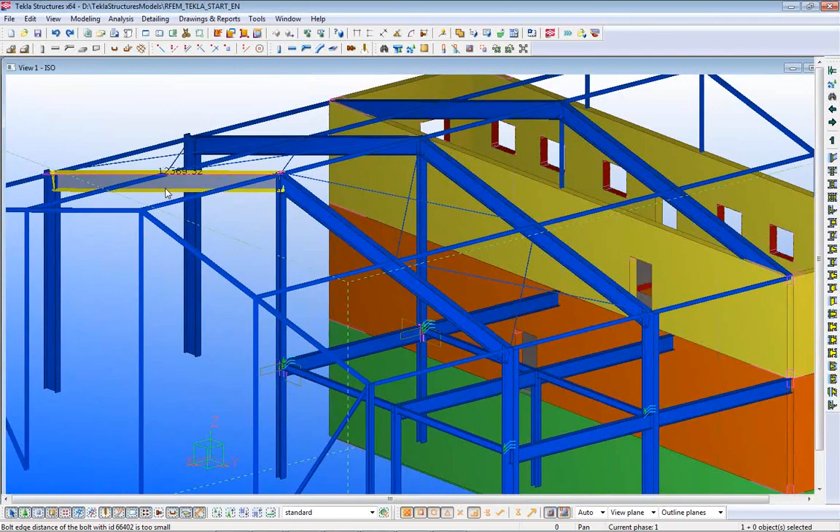Yeah, we can also check if we have internal forces. We see here also this part of the structure is still one part - it's not two parts like in the analytical model.

I can right click on it, inquire part, and we see here information from the Dlubal software. We see here the internal forces, bending moment 188, shear, axial force. We see here also the member number, or in the Dlubal software, material, and we can reference to those objects as well.

So let's see whether we find it - 167. I go here, member number 167. Yeah, I can select it. I can say, please show me only the selection.

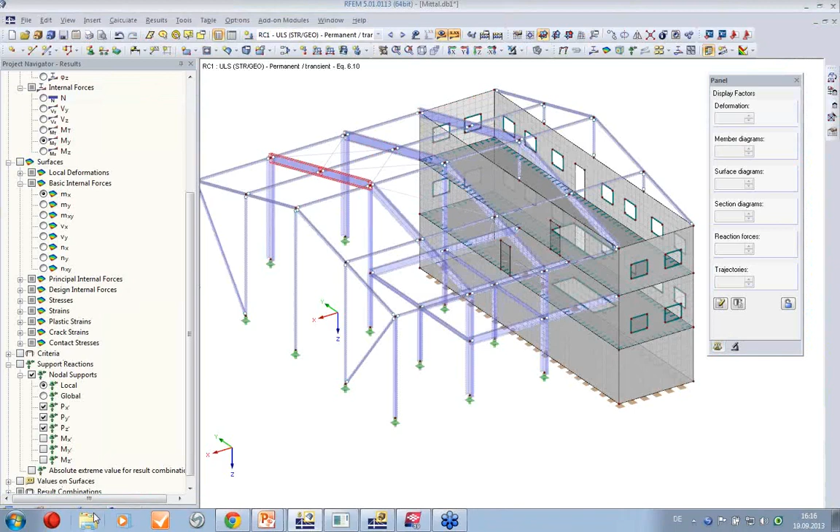Excuse me, show me only the selection. And I want to have the results here of the internal forces: 188.5, and this should be the value here.

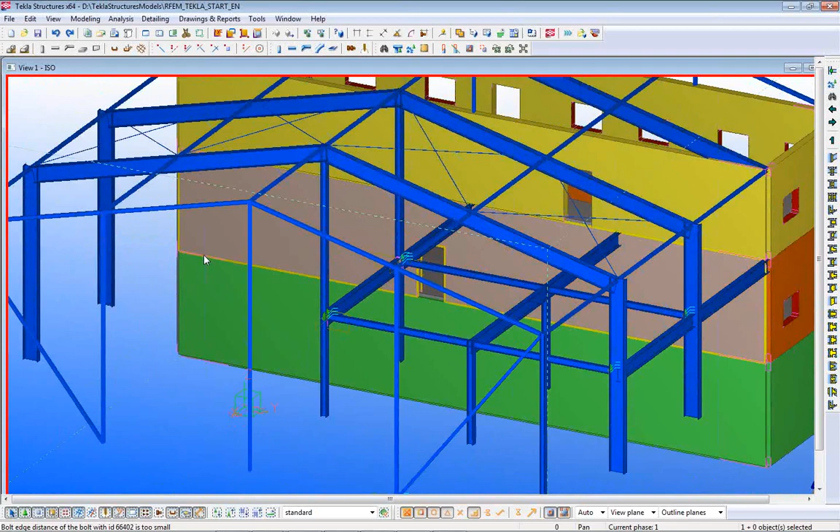188.5, moment M2. So now we can use this for information in a connection design, for example. This is also important to know: all the beams, for example, are still top of steel. All the work that has been done by the detailer is still not lost. It's updated, and we get here the changed situations of cross sections, surfaces, openings, and so on.

This is what I wanted to show you live today inside our software and in Tekla Structures. I hope you could learn something from it and everything was interesting for you. Let me go back to the PowerPoint presentation, and I'd like to point out a few more things for you before we separate today.

I think Robert answered quite a few questions. Maybe I should take a look at those before we move on to the information with the other software. There was one question whether we can handle general sections or non-standard sections.

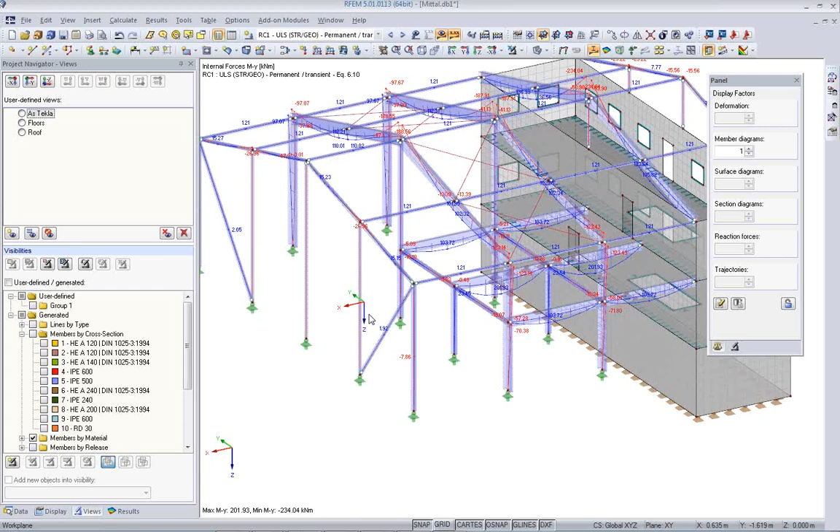I have shown you the mapping file. Maybe I need to explain this in a new structure. Hang on, I open a new model. I save it, maybe better. Sections - no, not, okay, we can use that as well.

This is a typical question, and it's not surprising that it comes up here as well. Here, for example, I have a few non-standard sections, like a C section, or these are sections with variable depth, parametric sections, and I can also do things like in RFEM. I have also a typical model for it.

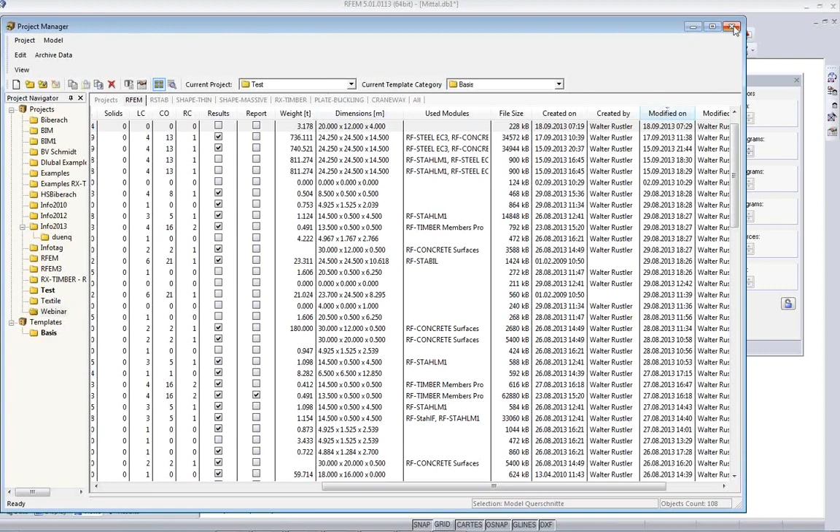I can go here in the project manager. Hang on, open it new. And we go here and find sorting models. Just a second. Sections. Maybe now. Okay, where is my model?

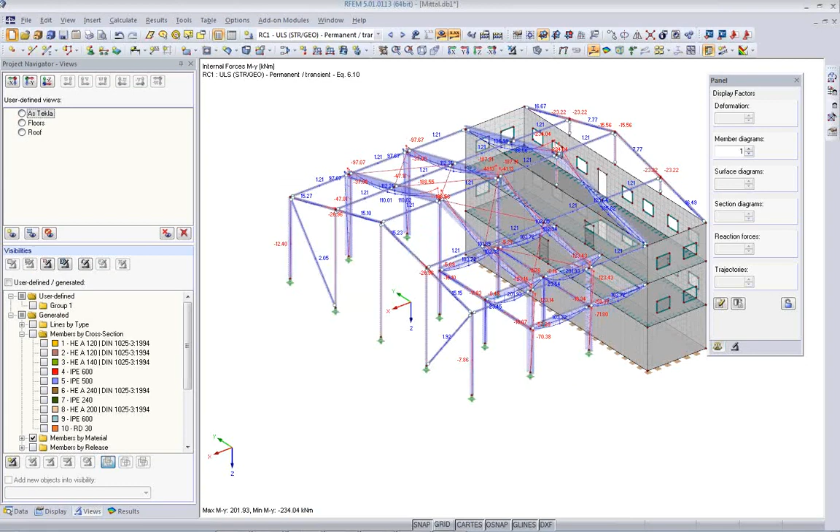Okay, never mind. Let's use just a Tekla model. We can do it that way too. I create a new file. And I import this non-standard section from Tekla - it doesn't matter, we can go this direction - into this file. Import.

Okay, analytical model, okay. And here I have my new cross-sections. For example, there is this C shape, and there is also a boxed shape, which is called in Dlubal, for example, like this.

But in Tekla, it's called differently. It's called WB 500 and so on. But we internally mapped those cross sections, and I can change it now here.

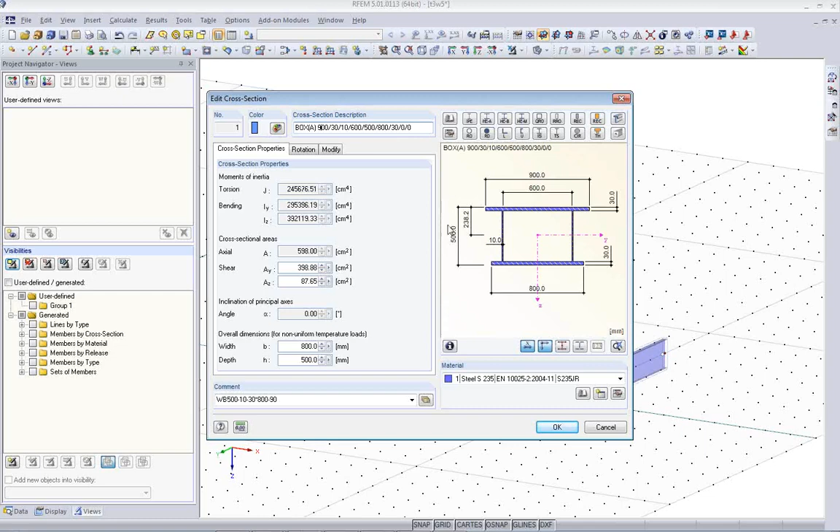For example, I go into the cross-section library and I change it here to, let's say, 900. And maybe this should be 1000. So it's wider. Okay, okay.

Where I can change also the depth of this welded section, where I go in the library. It's better to maybe do this in the tables. Hang on, you can see it better. Cross sections.

Yeah, and I change it here to maybe 1200. Width should be 200, and so on. I right away have all my cross section data here.

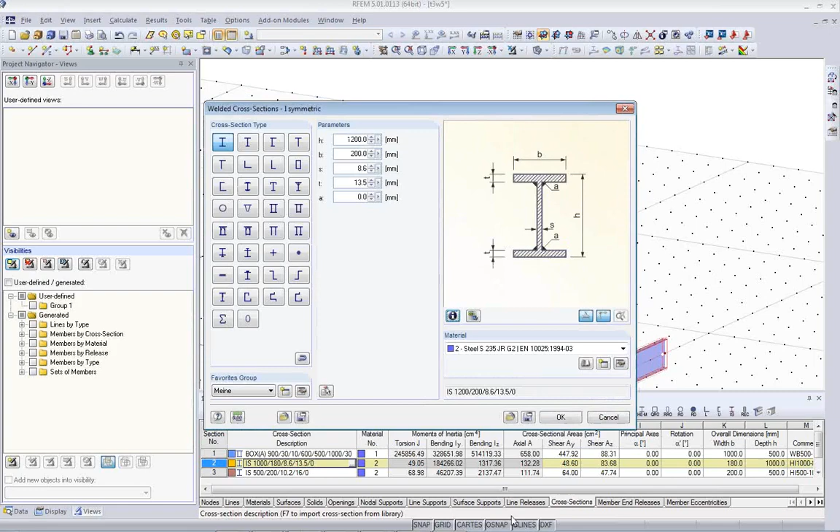Okay, okay. And this changed information I send to Tekla now, and I update the structure. Update existing model. Okay. And I look into Tekla, and everything is updated now. I have here 1200, and this parametric section is also updated.

One more word to this C section here. In the import detailed settings that I showed you at the beginning, you can see here the mapping file for materials, but also for cross sections. And here I have this cross section: in Dlubal, this section is called KC200 by 2.5, provided by Stauber, and I map it this way.

So in this way I can map any cross section I like, and you can very comfortably work with this import export to Excel options to create such mapping files. Standard cross sections are mapped by default with the software, and others can be handled with the mapping file.

The question was if we can import and export IFC files. I can show you this as well. IFC is supported here: import industry foundation classes, IFC. We support the structural analysis view and the IFC coordination view. It is important to know the difference.

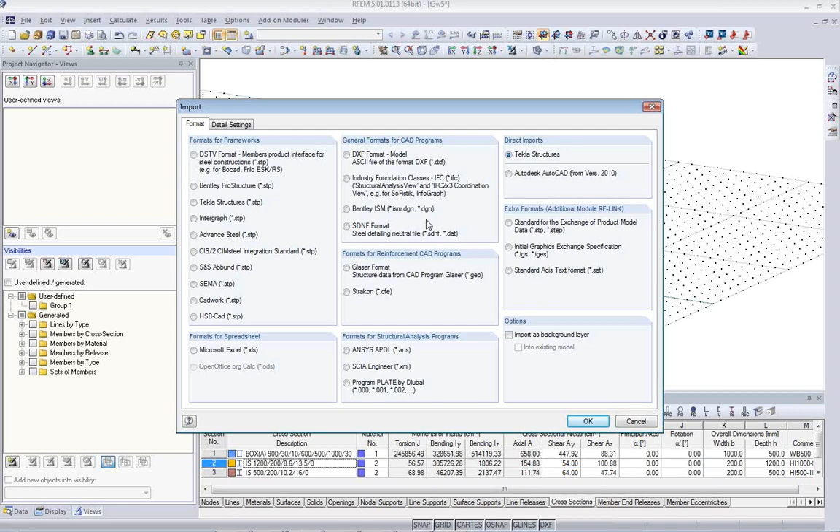Can I use springs as a release in Tekla? As I said, in Tekla you need to have an analysis model. You can set up releases here and also spring constants - they can be, for example, a spring. If you have this spring constant, then we also import this spring constant inside our analytical model.

Then there was the question again, can I export a model from Dlubal to Tekla? Yes, we always write the physical model, so we're not writing the analytical bar model, but we write the physical model. Maybe I can create a new model or open an existing model here where I have an empty model that I can use to export something into it.

Let's see what I have here. We can, for example, use something like this. This is a real project from a customer of ours who did some analysis of a multi-story building, and we can export this to Tekla Structures - export, update existing, or overwrite in this case.

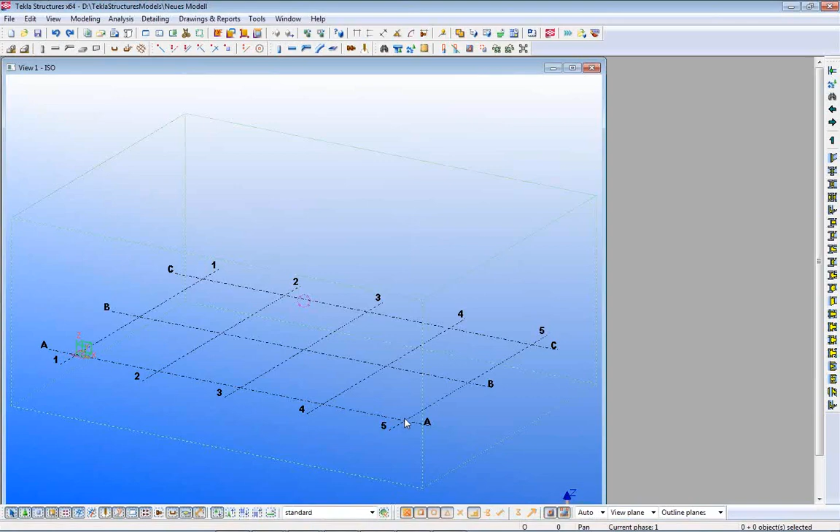Okay, we have no results yet, so after a while we should see the model showing up here. It's built up here, and we have the 3D model, and Tekla users can use it and work with it as well.

Okay, I think Robert answered most of the other questions, and also I think we have spent a lot of time. Usually I plan to be here for a little bit over an hour - it's 1.5 hours now. So let me point out a few more sources of information.